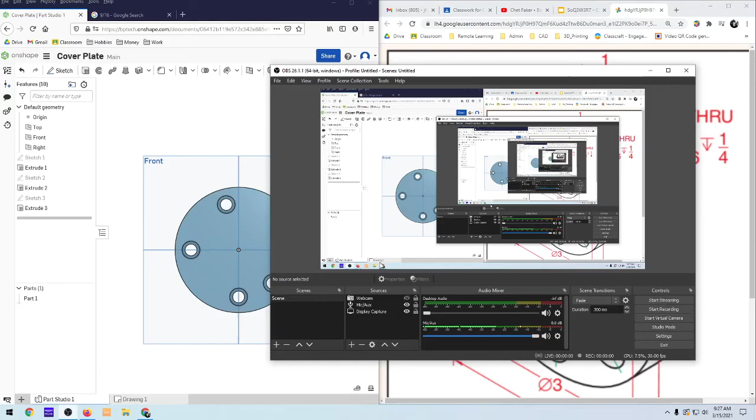So it's a pretty basic design here, but we'll be working on different angles. I will be going over how to make the part, and then I will show you a representation of the drawing, and you should be able to do the drawing on your own.

I'm just going to start a new part studio here, and for the first thing I'm just going to create the circle. So sketch, front plane, get normal to the front plane with the N key, C for circle, going into the center here, and dimension it out to 4 inches, and then extrude the cover plate, and that's going to be a half inch thick, so 0.5.

Green check mark. And now we're going to line up where all of these holes are going to go by making some construction lines. So sketch, choose the front face again, and now I'm just going to be creating some construction lines. So C for circle, and then Q is my construction line hotkey. I'm going to go from the center here and bring it out, dimension this circle out to 3.

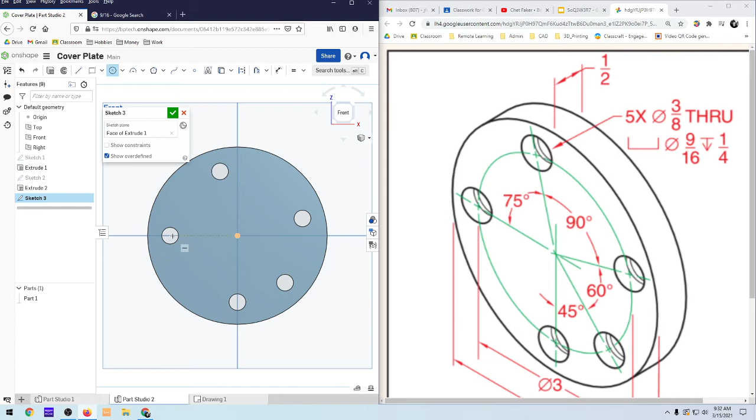So now we got the hole of 3/8. Now we're going to just have to go over those again and add in the 9/16 counterbore. So sketch, click on the front face here, and then I'm just going to go around and make the circles again. This time they're going to be in the center of the holes. So when you hover over it, you'll notice that orangey yellow square comes up, and then there's a concentric condition that pops up. That's what you want.

I'm just going to dimension this first one out to being 9/16, and then I'm going to set them all equal to that. So E for the equal, and I'm just going to go around and set them equal to each other. Once you have that, you're just going to click over to extrude, remove, and then it's going to be 1/4, so 0.25, or again you can do 1 divided by 4.

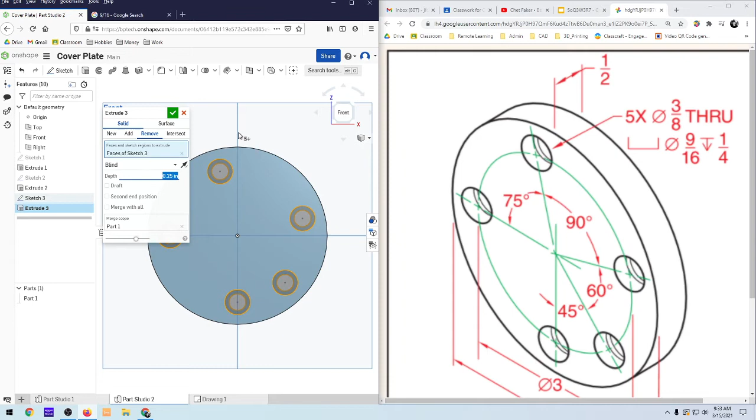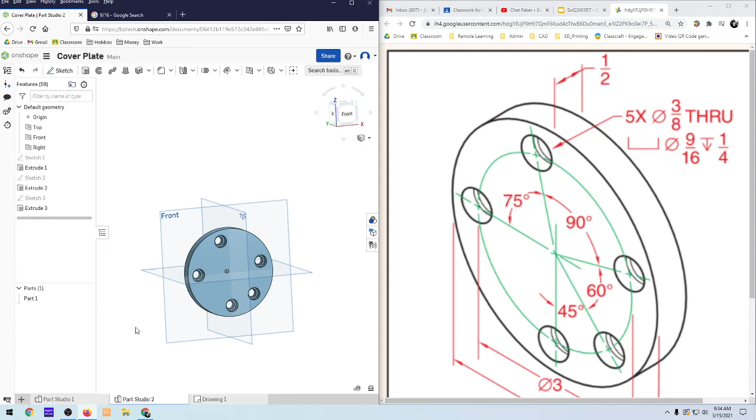So from here, we're good. That's it, so it's a fairly simple part once you know how to input these angles and figure out how you are going to put them in there. There are other features that let you make circular patterns and things of that nature, but sometimes it's easier just to do it out, especially when you're working with a bunch of different angles. If these were all equal and evenly spaced, the circular pattern would work much more efficiently. But since they're all different angles, sometimes it's easier just to draw it all out.

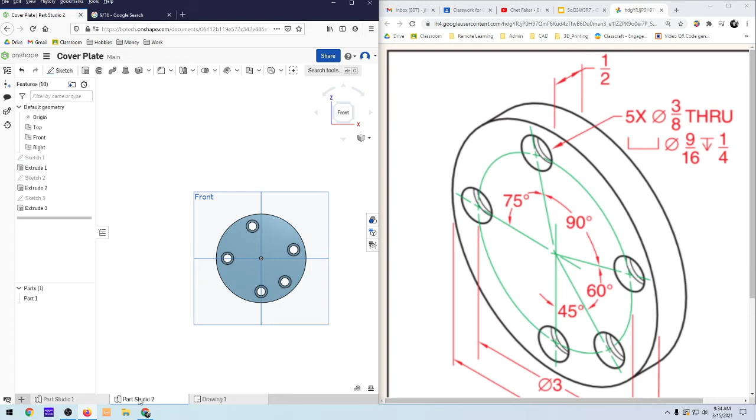So once you have created the part, you're going to go right into the drawing, and this is the drawing that you should make. This is the top view of the drawing, and the top view can actually highlight the depth or the width of your part in this case. So I called this the front, and that is indeed the front, and then our isometric view actually looks like the drawing that was given to us, so that looks pretty good.

Make sure that you mark these center points, and make sure that your angles are even. What you're going to have to do is actually create some lines that go from the center of the circle out to the midpoint, just to give it some more dimension. I mean, they don't have to be there, and if you get rid of them it does clean up the space a little bit. You might want to go for that look, but I don't mind the lines being there, because it kind of shows that everything is being based off the center of this circle, this cylinder.

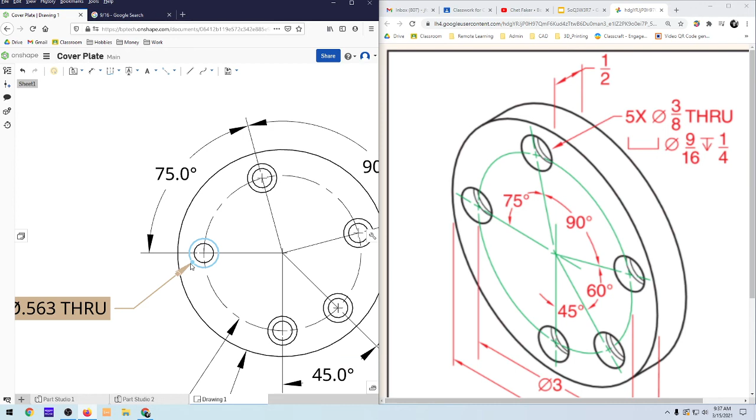Oh, my mistake again. Okay, so let's tap out of this for a minute, and I'm going to change what I am dimensioning. I am dimensioning the counterbore here - I don't want that, I want that. And notice that changes it by quite a bit. So now it's 3/8 that we're actually working with. Again, as you're moving through this stuff, you're going to find your mistakes, and that's okay - it's good that you're finding them.

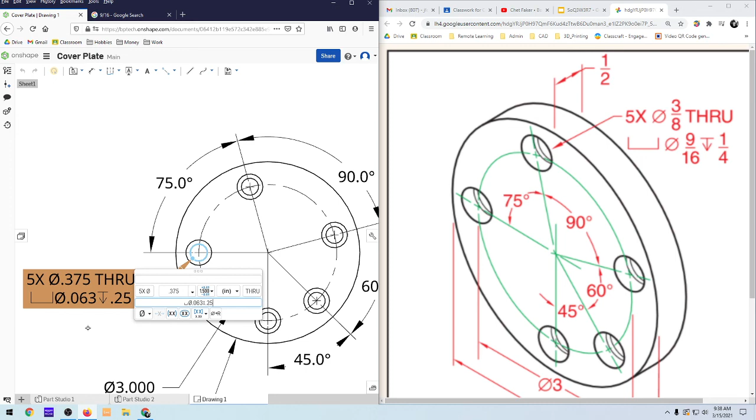So underneath here, I'm going to put in that counterbore symbol, and then my diameter symbol, and then I'm going to put 0.5625, but I'm just going to put that at 0.563 because we're working with 3 decimal places here. And then the depth is going to be 0.25. Click outside here, and now we're good.

So we have our note on the hole, we have our degrees of where they are all placed, and we have the 2 necessary diameters - the diameter of the actual object, and then the diameter of the construction circle where all of the holes are lined up on. So from here, you are pretty good.

So now you're just going to go ahead and fill out the title and fill out the drawing number, and make sure that they're in a format that makes sense.